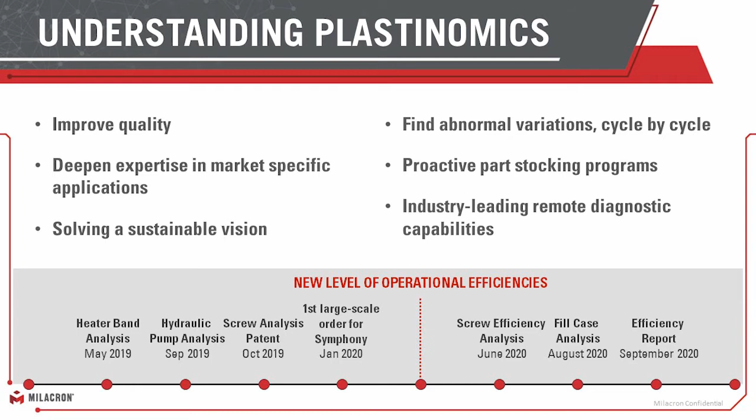So some of the things we're going to go through today, if you see down at the bottom, we have a timeline that shows you the applications we've developed, and we'll go through each of those and get a little bit more into the details. We've talked about those at a high level, but we're going to get somewhat into the details, some of the use cases where we've detected these things for our partners, and then we're going to turn that into how we've shifted the platform to this Plastinomics view, shifted that insight into something that looks more towards the customer's top and bottom line, more towards their sustainability goals, and really helps us drive meaningful recommendations to the customer rather than just, hey, it's time to change this component.

So before we get into the applications, we wanted to take a little bit of time to discuss how we're looking at these things and what we're doing to leverage a global fleet and push meaningful things to each individual machine. With our system, as we stated, we started a few years ago really trying to understand where we can help our customers the most. Today, what that's turned into are customers that are actually using our data to help manage their business and create a culture of actionable insights based upon machine data.

So we have on the slide here where customers review OEE and trends, and that is very true. But this has even turned into certain things today where customers will take these actionable insights, generate real live work orders based off machine data, and follow up on these items because they know that our data has proven real insights will be found, real things, real benefit will be had by that customer when they perform these items. How have we done that? That's the challenging part, and what we're going to get to.

So here in the first part of this, we started to look at this and said, let's first start by detecting when we can see wear and tear of these components. What that quickly changed into is we need to get to the point where we can give the customer a health score. We want the customer to be able to understand when they're at 100% health, when they're at 80% health, when they're at 50% health, and let them justify when it makes sense to change that.

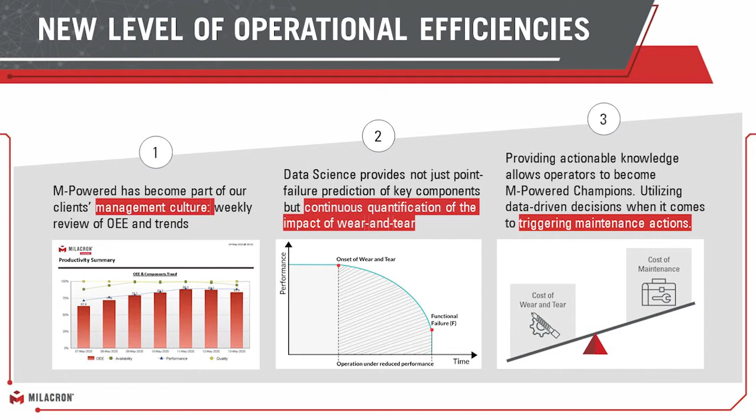I mentioned a little bit about the hardware as well. So we talked week one, and we expanded upon that a little bit in weeks 2 and 3, about our global fleet and how we're leveraging it to perform and learn and develop analytics. Now I want to talk to you a little bit about how we're passing that back into the machines. So on each machine, we have unique devices that allow us to do edge computing.

What you see is two examples of those here in that top left-hand bubble: the Symphony and the Amphion, which actually have a lot of capability, onboard storage, and a lot of capability to do edge computing.

This means we're not continually sending millions of data points into our cloud interface. We are constantly learning and then passing back down to those devices ways to mathematically transform that information into something more meaningful, cutting those in half, or in some instances down to 1 or 2 data points, where we're able to perform all of these analytics on the machines.

And then pass that information, only what you need, into an actionable dashboard. From there, these devices, having this connected fleet, allow us to push back down to the ones where we're not doing the studies, these same type of analytics.

So if we, for instance, learn of a failure pattern in a motor, a unique motor that says a front bearing is going out, it's very critical that we're able to study that, put that on a machine where we're seeing this pattern. Then, once we've got something applicable that will work for the rest of the machine base, we can quickly pass that down to these other devices without affecting the customer and their data pool and their visualization of OEE.

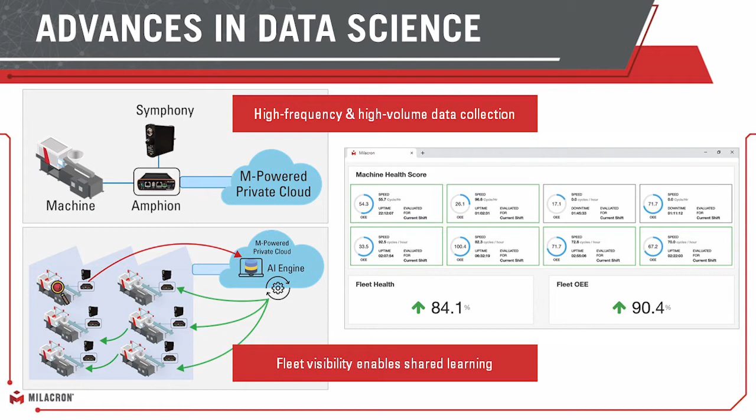But it also has the ability to handle millions of data points every few minutes to do this real-time analysis, and then analyze it, provide a real-time FFT analysis, and then push that either back up to the cloud, or analyze it directly on the pump and only push the insights back to our cloud interface.

Yeah, okay. What I was trying to do is distinguish the function of Amphion from that of Symphony, since there are two different devices. What does one do versus what the other does?

Amphion is there to collect and aggregate data on a work cell. The Symphony is specifically a device utilized to analyze the pump itself and provide actionable insights into our pumps on our machines. This application is being pushed to a few of our beta customers, but it's one that we wanted to get out there to our larger customer base as a whole.

But one of the ways that we're taking this actionable insight, if you think back to our relational topic with the car, where we said it's recommending you change your oil based upon machine data, we're taking that same thought and mindset, and moving that to the machine.

When we look at these items we'll see on the next page, it's important to do these things to make sure your machine's running optimally. We want to make sure you're being given the right maintenance items at the right time, so you're not under or over maintaining your equipment. We want to do this not just for the machines, but the molds running in them and the auxiliary components that are also providing value to creating a good part. We want your whole work cell running as effectively as possible.

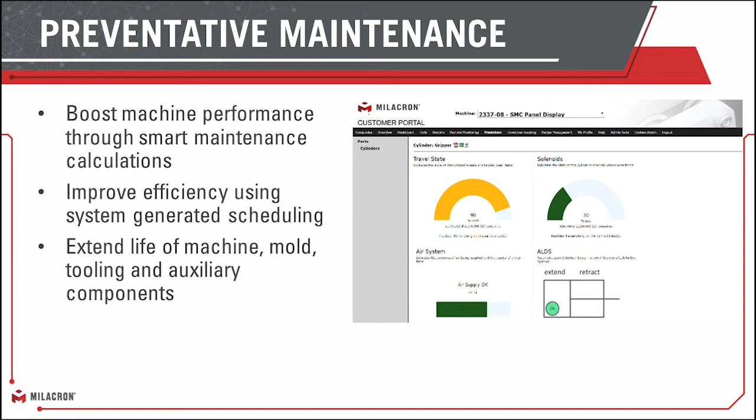This application really leverages the learnings we've had over the last 2 years taking a deep dive with our customers. We've seen different areas where customers have teams dedicated to this, with a whole parts stocking crib for every maintenance item needed on these presses, all the way down to doing it only when they have to, because it's costly to keep people in place to do this when that money could go toward additional components or people. It's a very costly item, but unfortunately it has to happen to keep the machine running optimally.

So Milacron, in an effort to help with the cost of doing this, with the staff expenditures you have to keep in place to manage all these work cells and charts - every time a machine goes down, here's the 10 things that need done, here's the parts needed to do it - we wanted to encompass all of that in one application and help you, the customer, start to understand when these things need done based upon the actual runtime of those devices.

If I have 10 things due every million cycles on the machine, you want to make sure you're not going to run over. So if there are things sitting at 999,000 cycles, or things way under based upon when you would normally do them, we want to make sure that long, complicated list gets looked at effectively so you're doing them at the appropriate times. You're not going out of your way to take machines down when they might not need to be, and on the other side, you're not under-maintaining them and risking a potential catastrophic failure because you forgot to lube something.

Eventually, as we start to morph this system - and we're going to talk about the predictive side next - as we look at the predictive side, we're also leveraging that same capability so that some of these aren't based off of time at all. Some of the recommended maintenance will be based off real time analytics, and in the next 2 years we have a goal to make sure everything on this list is based off real time analytics. Now, we may have to put new things on the machine, things that have to be designed into the machine, but in some form or fashion, the machine needs to tell our customers what needs maintained, and it needs to be based on their usage. It can't be based off customer XYZ's usage.

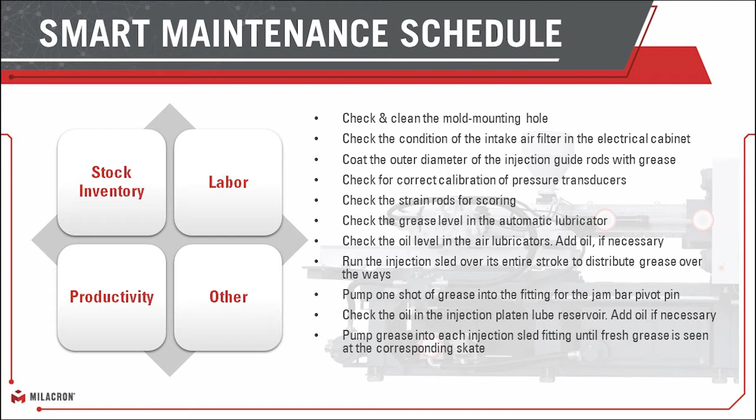It needs to be based off what am I doing with the machine? How do I operate it? What parts am I running? Do I operate a particular mold between 4 or 5 different presses? I need to understand how many cycles it ran between each, how fast it was being run, the pressures going into it, because that's also going to affect when I need to look at my molds. So we're taking this thought process, attempting to digitize it, and working with our customer base to make it a meaningful product that provides real time augmented intelligence as to when you need to perform certain maintenance items with your work cells.

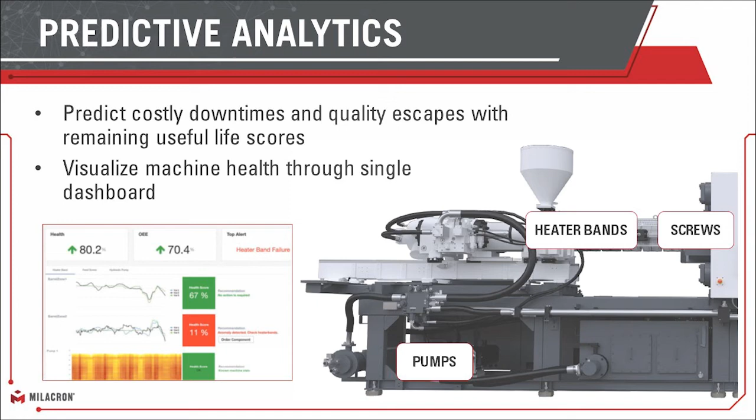When we go through these next few slides, I'm going to talk about why we went into those specific items. I think everybody can guess at a few of these just because of their importance to the machines. But we really picked these items due to their importance, and one due to the learnings that we knew would be had from it. Jumping straight in, the first one that we picked was heater bands.

This is something we thought at the time was not really game changing for our customers. It's something that we knew we had plenty of data around. We could study these. We had enough machines connected. And this is something that would get our feet wet into the predictive world. And what we were quickly able to see is that we were actually able to see when heater bands were failing and not just failed.

You can see with our 3 examples here that the first one, we had a failure detected on the 21st of March. We had it confirmed by the customer on the 25th, and we were actually able to see that a month in advance. Skipping down to number 3, you can see that same thing.

And the reason that we say we can see these way in advance is because we'd connect a machine, we'd do a study, see if things were failing. So it wasn't like we were sitting on data for 6 months or 5 months. This was us connecting machines, learning, and then passing actionable insights to the customer.

So what we did with our customers was provide this health score, provide this meaningful insight to them, and that resulted in a lot of changes. The component is something that didn't necessarily affect the production. It was something that wasn't always causing our partners to have bad quality. There were certain instances, but for the most part, it was something where the machine could run.

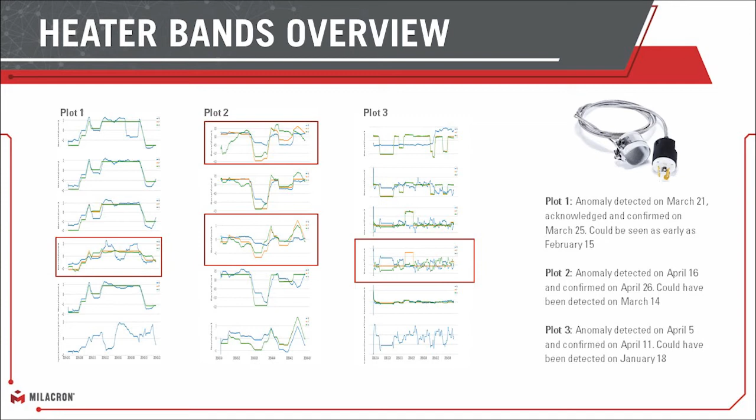In a few slides, I'm going to get to why we've morphed to the Plastinomics side, and I'm going to talk very deeply on why it's important for customers to change heater bands and things we've learned through these data studies, outside of just saying, hey, I can tell you when it's going bad.

The second component we're going to discuss is the Symphony, or the pump sensor that we use to analyze and detect real-time changes in state of the pump. So the Symphony, what you're looking at here on the left side, is the first version of our Symphony sensor.

This sensor was designed to do real-time frequency vibration studies of the pumps. So what makes this unique is that we've designed this sensor with our partner EI3 to cover a large frequency range, which most sensors off the shelf do not do. The sensor bolts on real time to the machine, and it works with the red box.

It works with the machine to real time look at data, to pair up and make a study of a machine and mold combination. So what we've learned is that certain failures do provide a unique pattern that we can pass from machine to machine, but most customers do not operate machines the same way. Even from machine to machine running the same mold, it could be the same similar design, but maybe a customer has a different set of set points that affects what you see on this sensor with any vibration sensor.

So it's very critical that this sensor can be on the machine real time, learn when the machine changes states. It's not something you want to have to constantly run a normal cycle and take the machine down to do these tests. You want it to run real time, because if a problem occurs and something happens with this pump, it could grenade into the system. It could cause extended downtime. It could cause you to have to clean your oil, replace valves. It's a very costly issue when this pump fails.

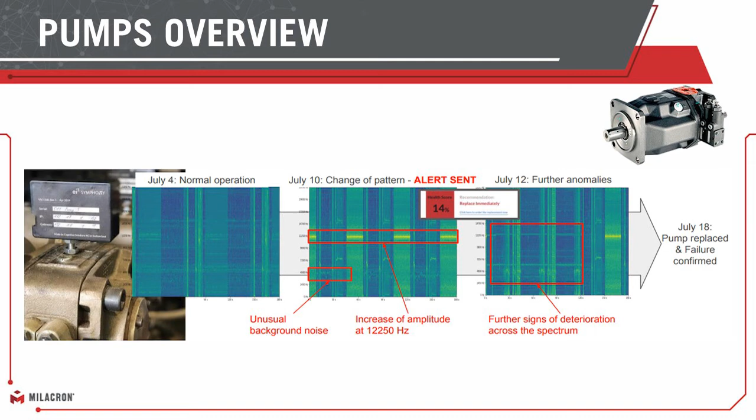Okay, the last component we're going to talk about before we jump into what we're doing in 2020 is our feed screw. What we're looking at here is an accelerated failure. This is not typical or indicative of all the things that you'll see out there with screws in the world. But what we wanted to show you is how our algorithm works, and then talk about why we're changing that and why we're morphing that when we start talking about the term Plastinomics.

This specific instance, the feed screw, which is a long lead time item, it's an item that can be very expensive, ones that our customers don't want to stock. In this particular instance, it was no different.

The feed screw, over a 6-month time span, we could see it started to creep with our algorithms that we're running with its performance. So it started to utilize a lot more energy. It started to put off a unique signature as the wear increased. In this particular instance, the screw actually snapped.

But what this has proved to us is that this algorithm can see real time changes in that screw. And we see this across every screw we look at. So our analytics tell us, without adding a single sensor to the machine, that performance is changing.

Most of the time, it's over a 2 to 3 year period. It's not something that you'll see in 6 months like this one, but it's very critical to understand and know that your algorithm is working and that it's telling you that these states are changing, so that one, you can see it, but two, you can start putting more analytics to it.

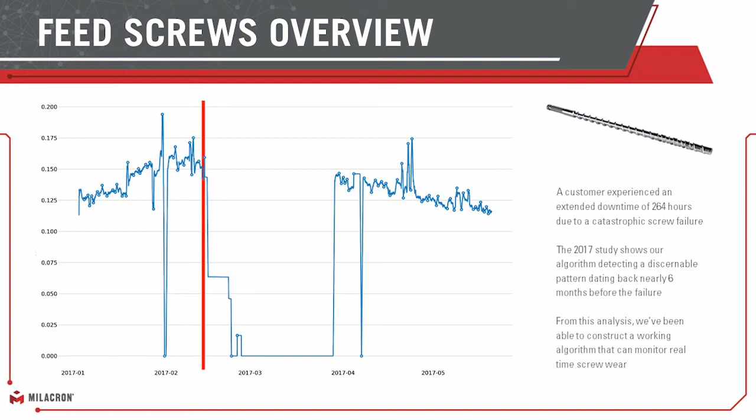And get into what we're doing in 2020, which is where we've learned from our customers it's not enough to tell them that that screw is degrading and that it needs replaced. Every customer will replace that screw based upon a different formula. Am I losing a number of parts due to quality issues? Do I have an increased energy cost because it's running, I have to run it longer to recover and build the same shot? Is it doing something to my cycle?

Has it finally went over the point where my cool time is not the driver for my cycle? It's the screw itself. And customers will balance that equation to know when to order it and when to replace the part. We also learned that everybody does this differently.

It's not something that I can put a one size fits all blanket on and customer X is going to order it at the same time as customer Y. They may even have a 10 times difference in the cost of the screw per the machine.

So what we've done with this Plastinomics concept, I really want our customers to understand what that name means to us. We've given our customers not only the actionable insight of your screw is wearing, here's how much it's costing you to run that screw and here's what it's doing to your cycle, so that our customers know if it's costing me $10,000 a week additionally to run this screw, it makes complete sense for me to order this, sacrifice the downtime, and get to a point where maybe that number is 12,000 to replace it, but get to the point where I can replace it.

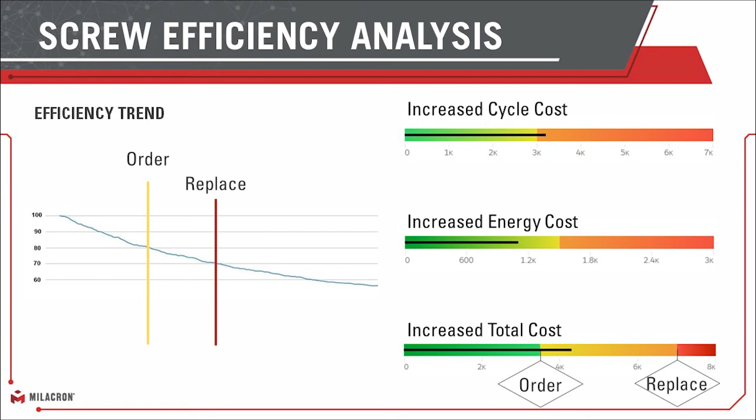We're working on changing these concepts, and some of the things we've started to add are things like fill case analysis, where we're looking not just at the screw itself, but the screw tip assembly. This component takes the brunt of the application in any molding shop, getting replaced probably 3 times more than any screw, barrel, or other item in that injection end. It's hard to determine where you'll start to see quality defects as this component wears.

So repeatability is very critical. It means a lot when you look at quality. Being able to tell, in real time, without an RJG system or something else, that this process is repeatable—we've learned that's very critical for a large majority of our customer base.

Our system will collect that high frequency curve in real time, and without somebody touching it, it will build an operating range of what we'd expect to see for a particular part being made. It will tell you if shots are starting to deviate outside that standard operating range. With that, we give you an easy to read number for repeatability, with helpful tips. You may be changing your process or using different resins—we understand that—but we want to make sure you know that cycle is becoming less repeatable.

We've actually found that we can morph that score into a tip assembly health metric. So you're taking not just the repeatability aspect, but saying what this likely means for the health of the component. We can show you in real time what it's doing to your cycle. You can combine that with your scrap data and say this component is pretty cheap—it probably makes sense that during our next downtime or PM shift we add this to the list. This is one of the reasons we're converting standard maintenance items into real insights based off machine information coming back to us.

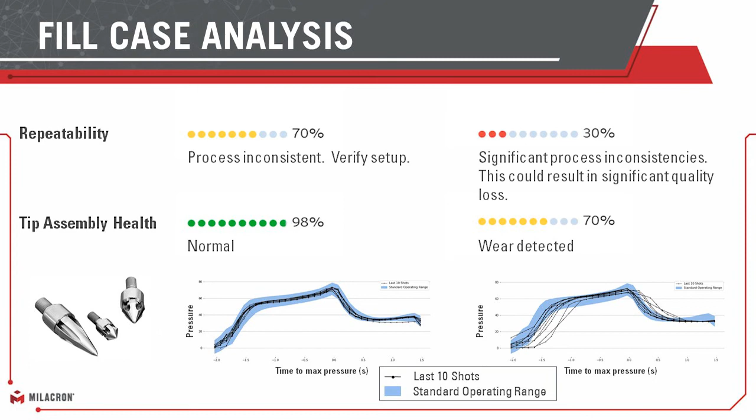The last piece we're going to talk about is the efficiency report. I hinted at some of the things we're getting to as far as evolving the screw tip assembly, and I mentioned on the heater band side I'd come back to a specific example of a component you wouldn't necessarily think you need to look at, and how that changes when you start looking at the energy and cycle effect.

So we started looking at heater bands, providing that insight to customers. We have a few really good partners who, even though it wasn't affecting their cycle, would change these components when we asked and send them back. We'd analyze them and see what it was doing to the cycle. What we've found is that customers operating with one or even two bad heater bands are spending $25 to $60 more per day in energy to run that same machine. Amplify that with multiple heater bands, inefficient screws, inefficient screw tips, and you start to paint a different picture of what it costs you to mold.

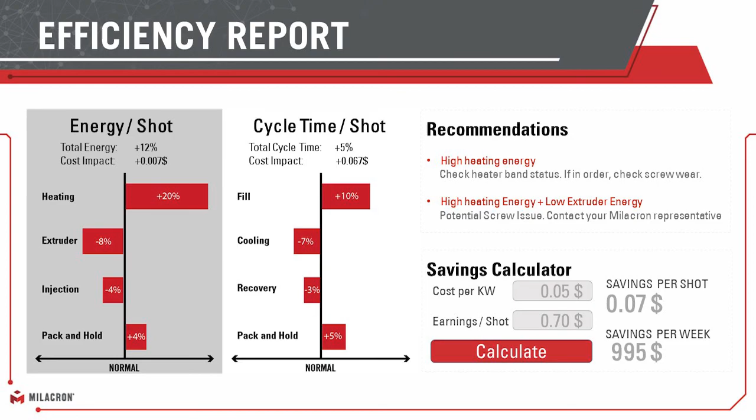Before I wrap up, I want to revisit this concept of the car one last time. Over the last 4 weeks we've built up from OnStar for remote support, to things that help you understand the performance of the car, to computers being plugged in, all the way to today's insights based on machine data we're learning from and passing down to our users to create that experience.

We hope this concept has been helpful. It's very relational to this entire M-Powered and Plastinomics concept, and something we're going to drive toward for our customers to be a better partner.

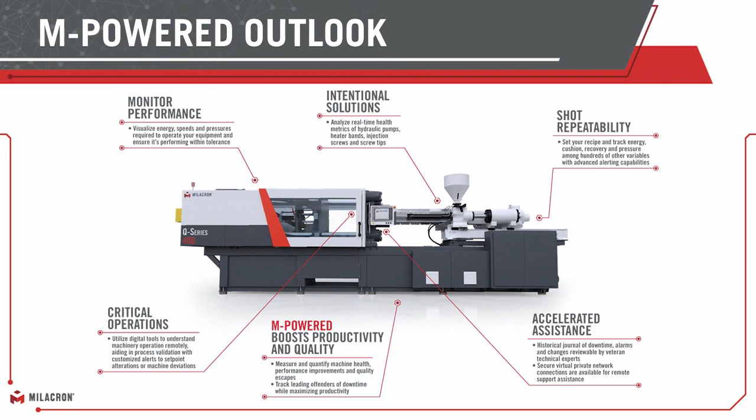If you have any questions or follow up, please reach out, connect with me on LinkedIn, send emails, ask follow-up questions — I'd love to have these conversations. We're continually learning, continually trying to take this data and pass it back to our customers. We have a bunch of buzzwords here, but really the intent is to safely and effectively give our customers unique knowledge and insight into these machines so they can make the best decision for the top and bottom line while keeping sustainability goals and productivity in mind.